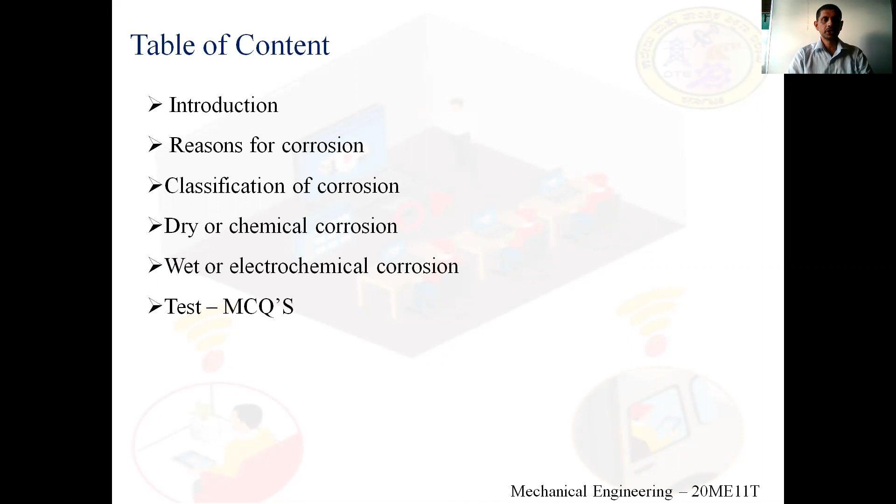Coming to the introduction, corrosion is the deterioration or destruction of metals and alloys in the presence of an environment by chemical or electrochemical means. It can also be defined as the destruction of a material by chemical, electrochemical or metallurgical interaction between the environment and the material.

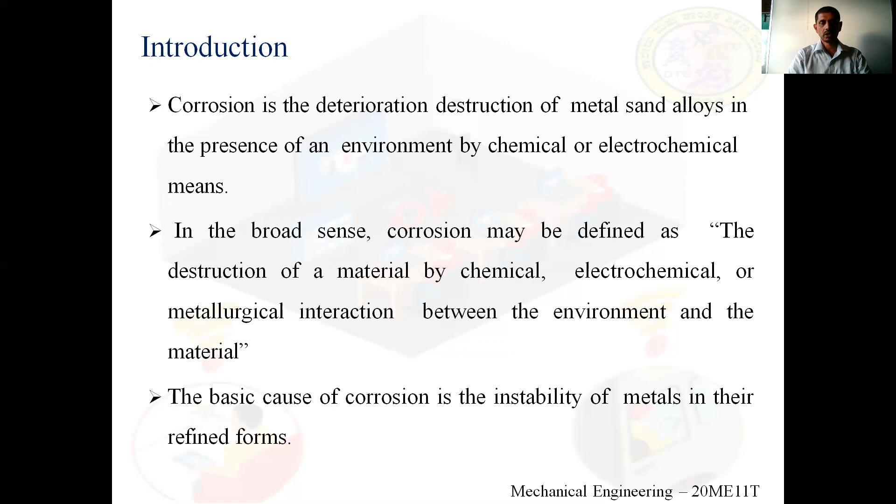Continuing the introduction, the metal tends to revert to its natural state through the process of corrosion. Because of corrosion, metals try to go back to their natural state.

Whereas noble metals such as gold, silver, and platinum will not get rusted or corroded, because they are not chemically combined in nature, they are uncombined in their natural state. Therefore, these noble metals will not be corroded. Aluminium and copper also will not get corroded easily.

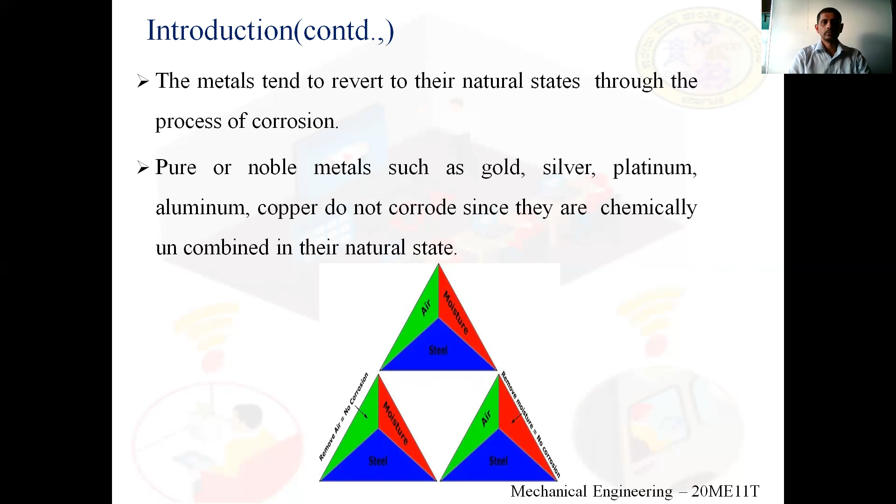Reasons for corrosion: first is reactivity of metals. If a metal is more reactive, it undergoes corrosion more readily, since when it reacts with nature, such as water or any chemical, the metal gets easily corroded due to its reaction with the environment.

Next is strain in metal. Corrosion takes place readily at cuts and bends of metals. For our application purposes, we cut or bend the metal as required, which creates some cracks in it. Therefore, at those particular cracks, corrosion keeps on growing.

Next, presence of impurities. If impurity is present in a pure metal, the metal undergoes corrosion more readily because it is no longer in its original form, since we have mixed impurities into the metal. Therefore, the metal corrodes more easily.

Next is the presence of electrolyte. In saline water, that is an electrolyte, metal readily corrodes because saline water is more corrosive when it contacts the metal.

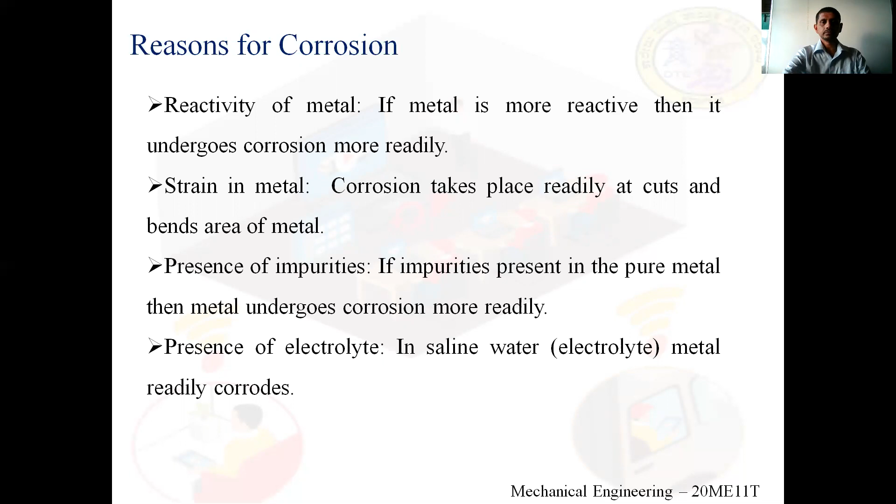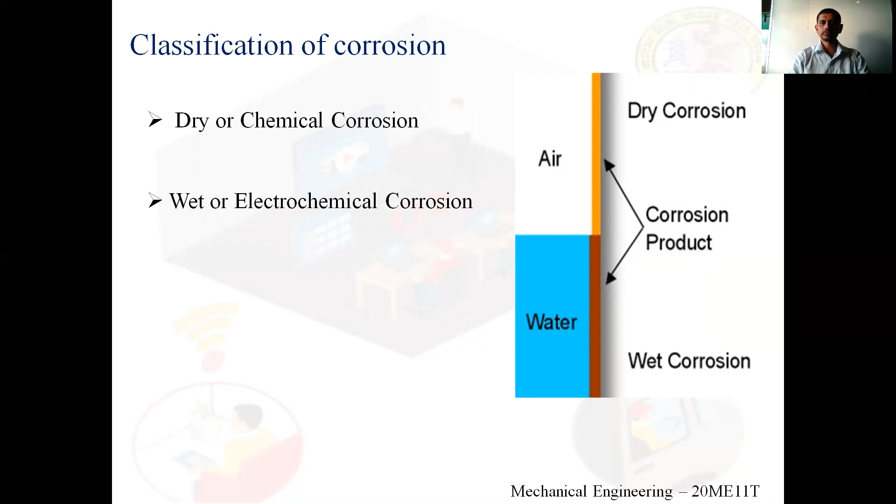Next is the classification of corrosion. Corrosion can be broadly classified into dry or chemical corrosion, and wet or electrochemical corrosion. In this picture, we can see the upper part showing dry corrosion, which is purely due to air passing over the metal. The second one, wet or electrochemical corrosion, occurs due to interaction with water, hence it's known as wet corrosion.

Now we'll discuss what is dry or chemical corrosion. This type of corrosion is due to the direct chemical attack of the metal surface by atmospheric gases such as oxygen, halogen, hydrogen sulfide, sulfur dioxide, nitrogen, or anhydrous inorganic liquid, etc.

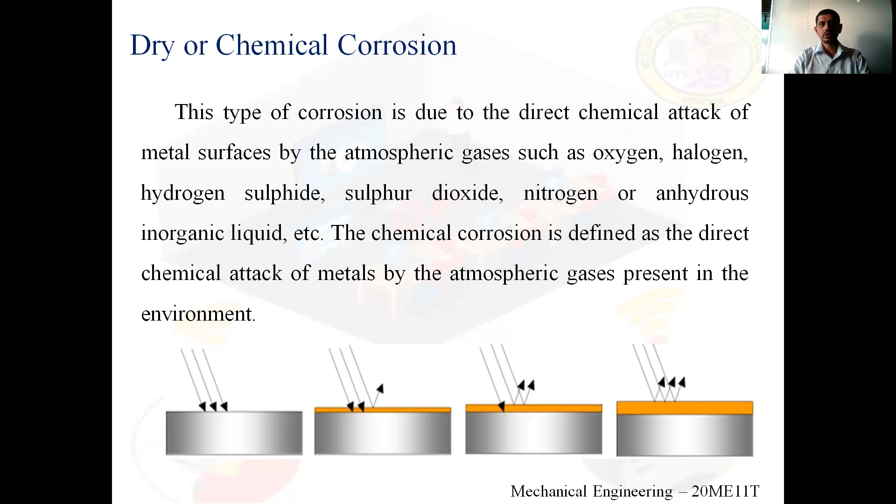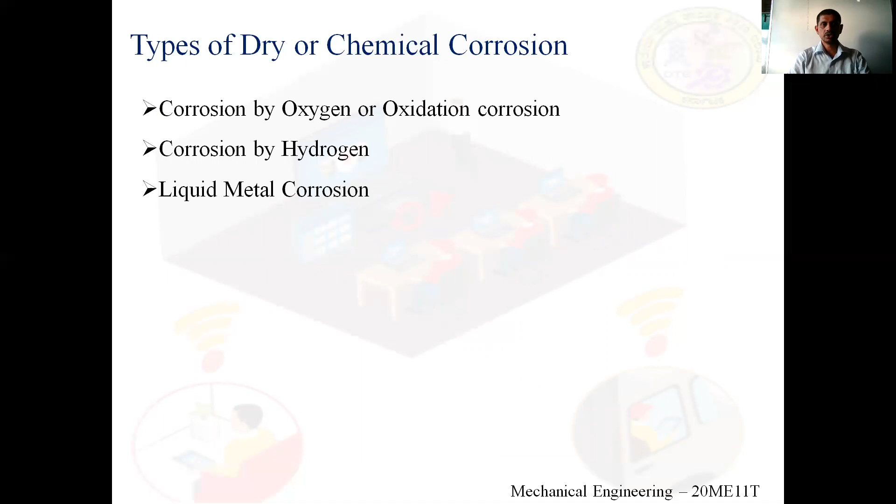Types of dry or chemical corrosion include corrosion by oxygen or oxidation corrosion, corrosion by hydrogen, and liquid metal corrosion. We'll discuss each individually.

Corrosion by oxygen, or oxidation corrosion, is brought about by the direct attack of oxygen at low or high temperature on metal surfaces in the absence of moisture. That is, there will be no water contained in the air, where only the air directly attacks the metal surface, creating corrosion.

Alkali metals, that is lithium, sodium, potassium, and alkaline earth metals, magnesium and calcium, are rapidly oxidized at lower temperature. These alkaline metals are broadly classified in the periodic table, with alkaline earth metals including magnesium, calcium, etc. At high temperature, almost all metals, except noble metals such as silver, gold, and platinum, are oxidized. Therefore, noble metals will not get corroded at any temperature.

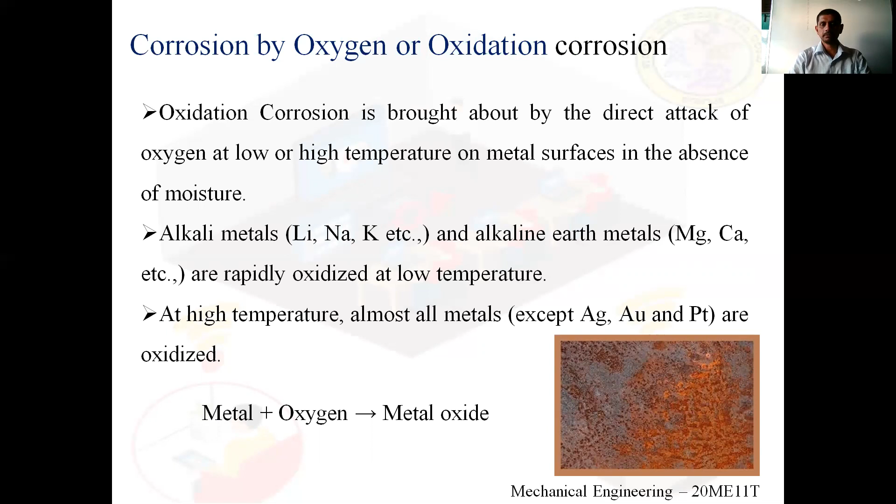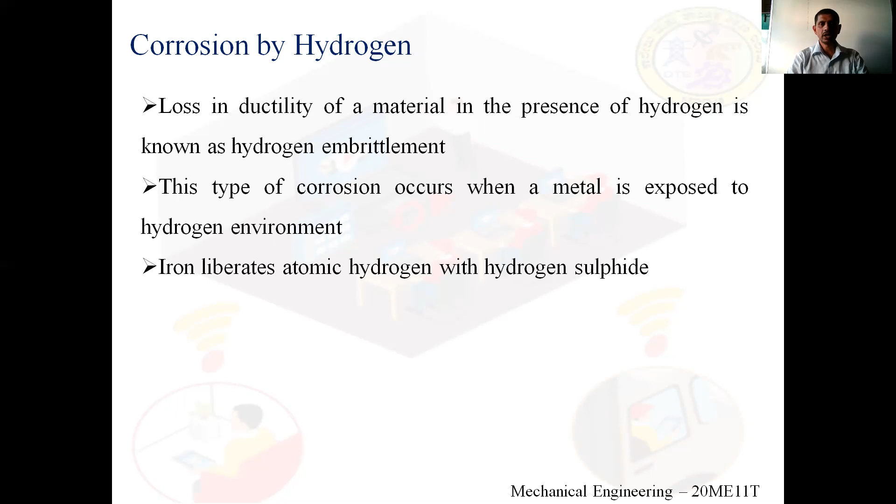Iron liberates atomic hydrogen with hydrogen sulfide. That is, when iron is in contact with hydrogen, it liberates atomic hydrogen with hydrogen sulfide.

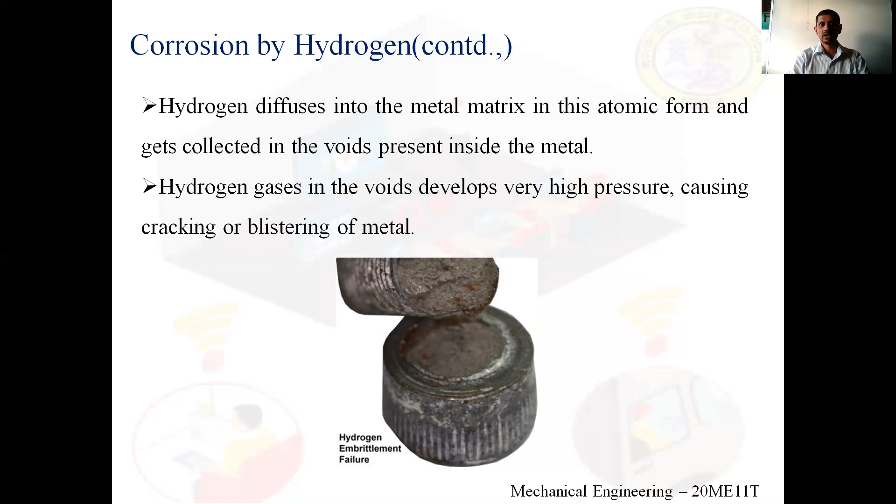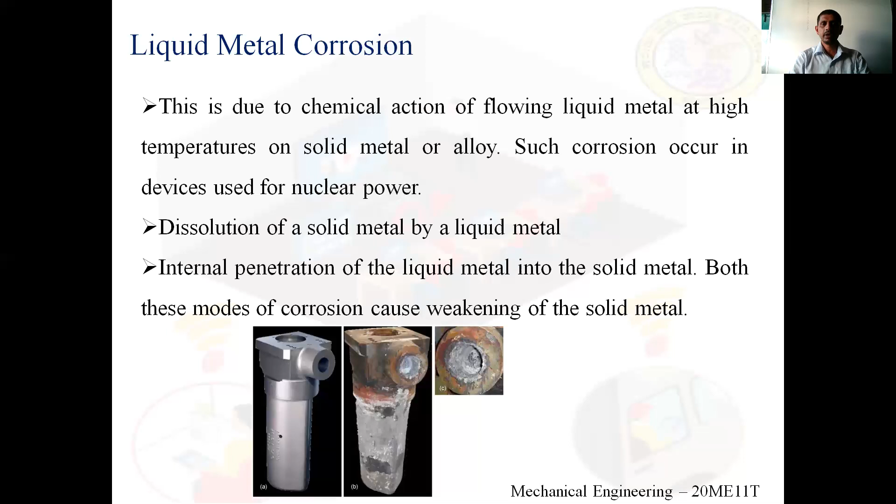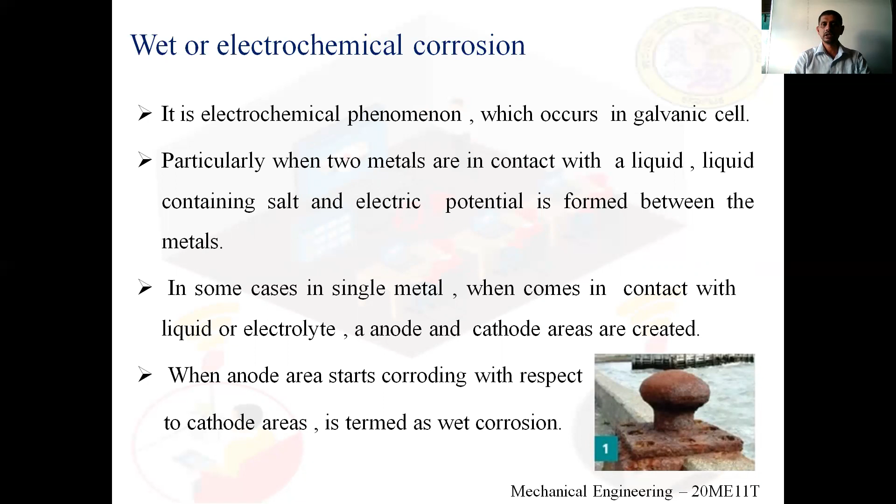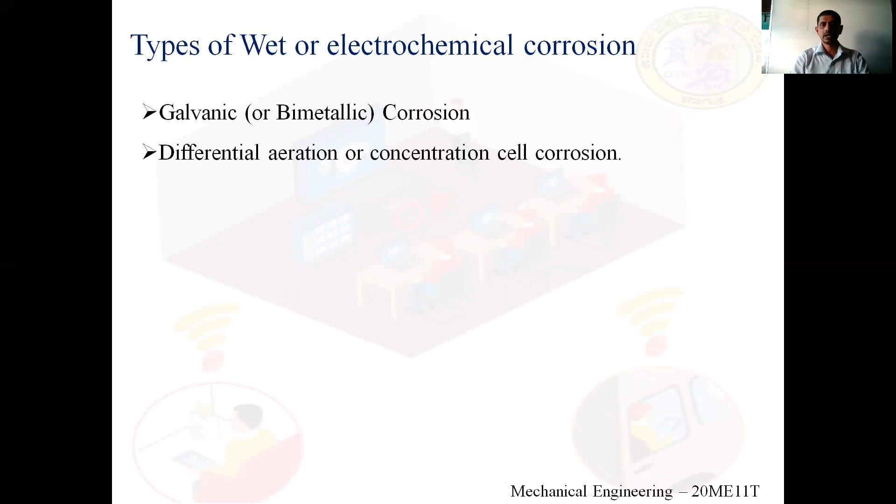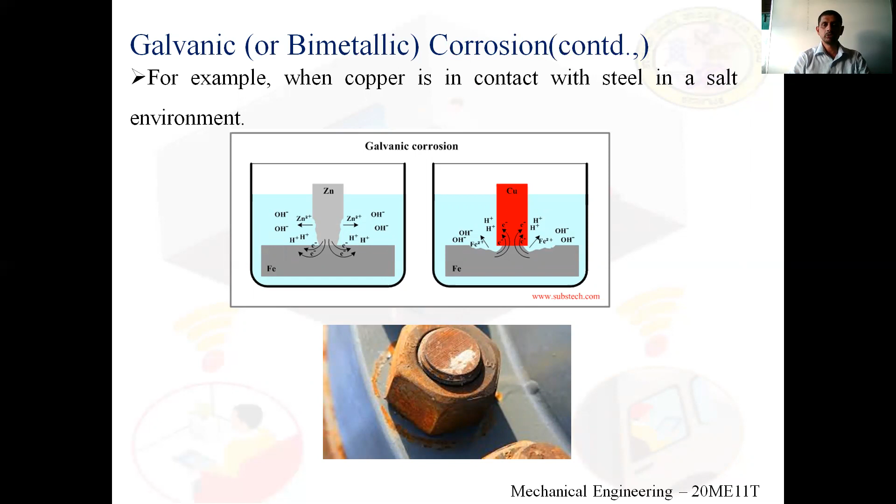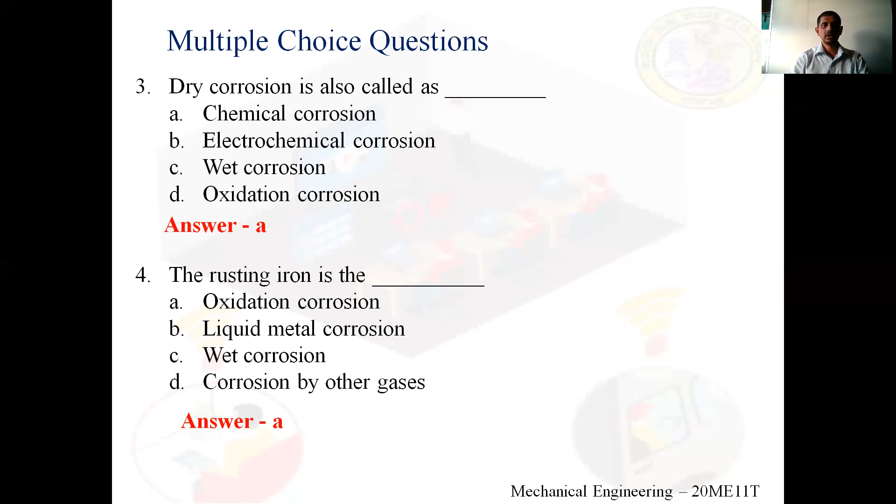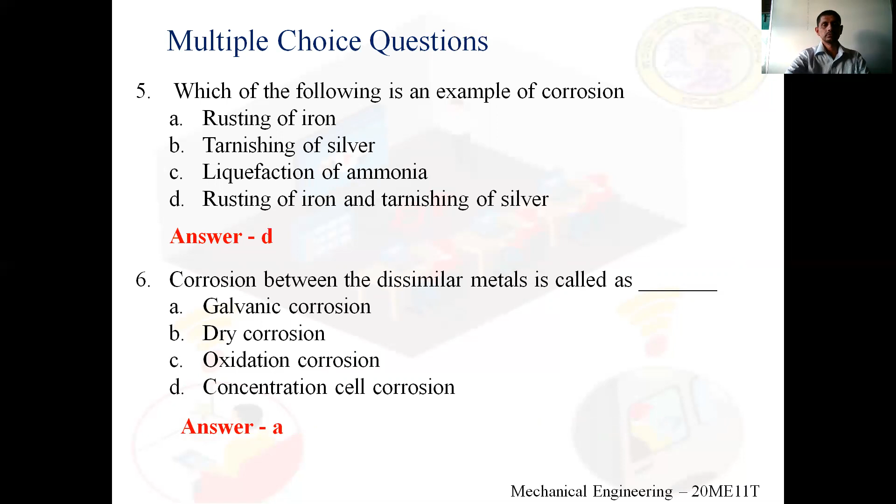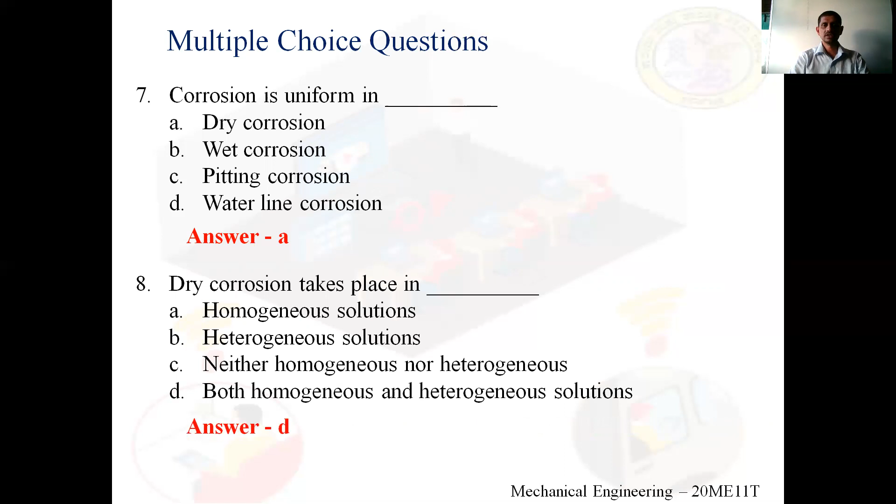The next question is, dry corrosion takes place in homogeneous solutions, heterogeneous solutions, neither, or both homogeneous and heterogeneous solutions? Homogeneous is where one will be dissolved in the other, whereas in heterogeneous one will not be dissolved in the other. The answer is D. Both homogeneous and heterogeneous solutions get corroded due to dry corrosion.